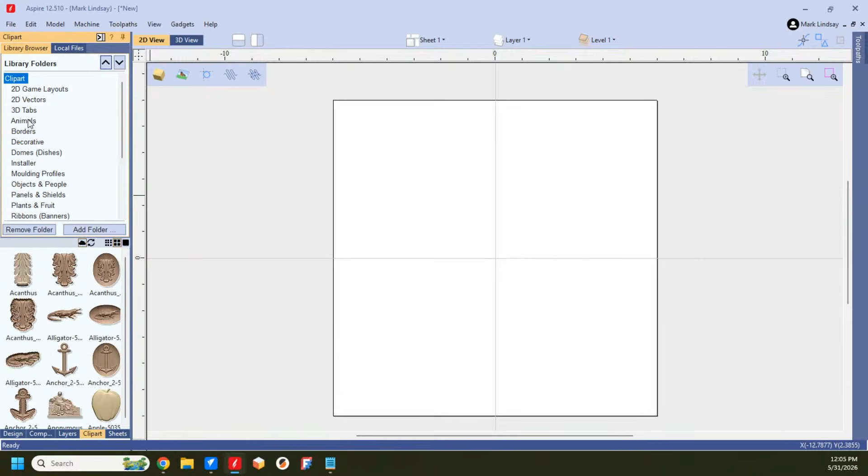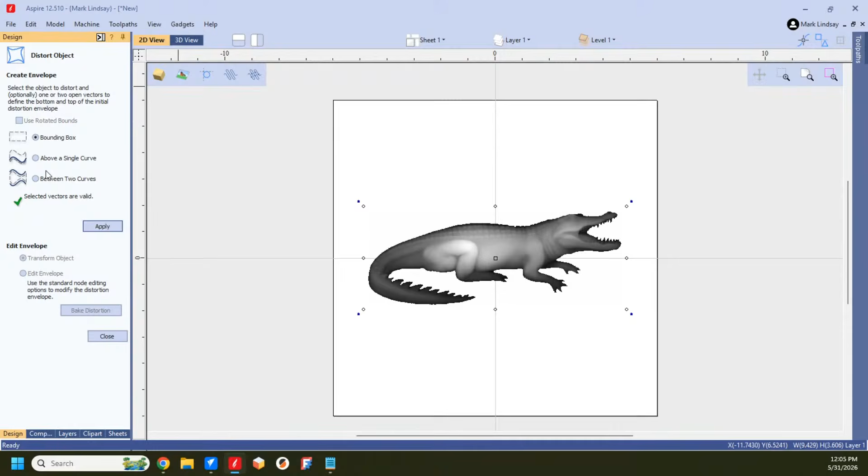Let me explain. I've got a session of Aspire open here, okay, and I'm going to go into the clip art, and we'll get our buddy Wally Gator. I'll double click him to put one in the center of my project, and hold down Shift and resize him about like so. We'll come back over to the design tab with Wally selected, and go into the distort tool. I'm going to use a bounding box - I don't have a curve drawn, I'll do one on a curve in just a minute. We'll click apply. Now we come down here to where I can edit the envelope, which is the bounding box, and I can bring this down, make him look taller and fatter, a little bit longer.

We'll bring this back here a little bit, make him a little bit longer, make him look a little bit more imposing. All of that is done by editing the envelope, using the standard node editing options to modify the distortion envelope.

Now what I can do is mirror horizontal, vertical, or exit node edit mode. I can insert a point, delete a point, smooth a point if I have one selected, but I don't have one selected. So we mirror horizontal—nothing happens.

Right click. I can change this to a Bezier, to an arc. I can insert a point. All right, so I've inserted a point. Now I can move that around a little bit. I guess I was right-clicking on the wrong thing.

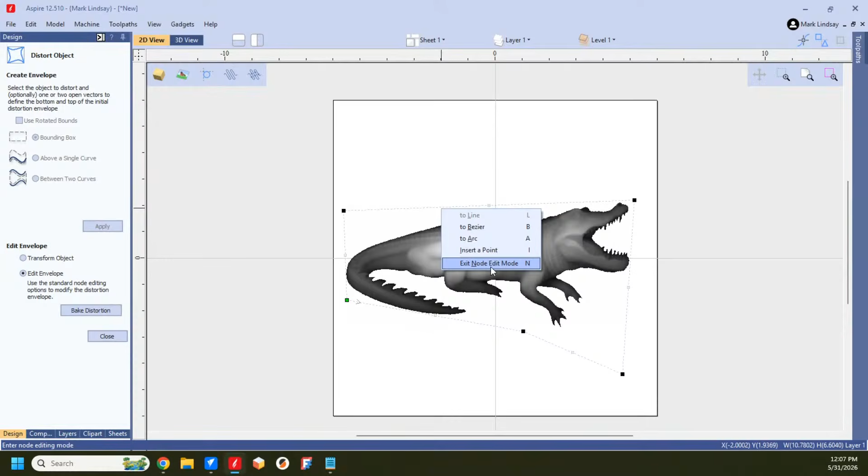Straighten out your spine, Wally. There you go. Now you don't look so fat—you just look like you have a bigger mouth.

The point is that you can distort 3D components. Now I have put him into an envelope and distorted the 3D model. I can close this, but it's not complete—I can't edit him now because he's still in the transitional mode.

With him still selected, I can go back into distort mode, distort tool. I have to bake the distortion to make this change permanent. So we'll go bake distortion. It says the component must be baked before editing. Okay, continue. Now Wally's been baked.

And I know how wrong that sounds, believe me. If I go over to my component tree, I see they've added the word 'baked' to the alligator title. So now I can come through and close this and do any editing that I want.

Or right click, component properties. Now I can adjust shape height, adjust a base height, fade, tilt—I can do all of that. I could not do that unless it was baked. It would not let me do that.

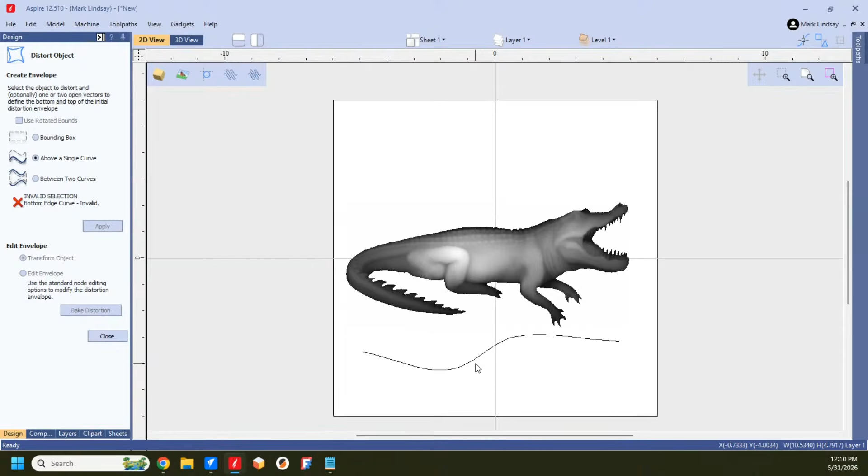Close it. With that curve selected, hold down Shift, select Wally, and come into the distort tool. I want to distort him above a single curve. I've got him selected. Now I need to select my bottom edge curve, which is this vector here. Hold down Shift, select bottom edge curve, OK, and apply. That's going to adjust Wally to match that contour, whether he wants to be or not.

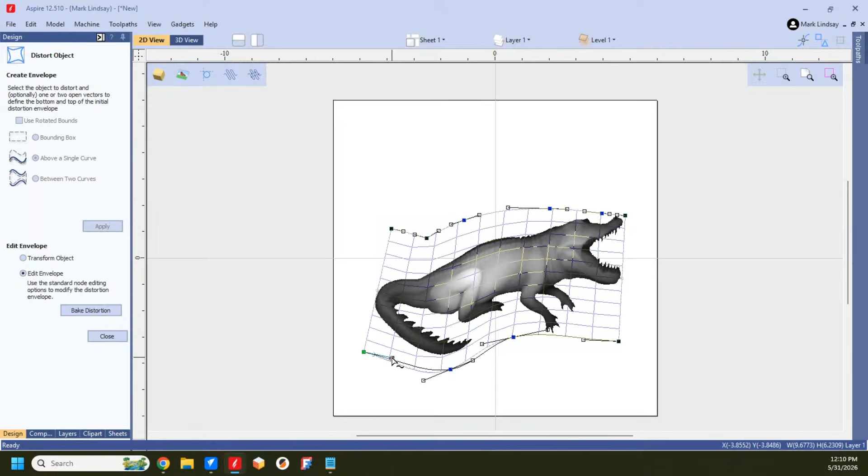But we go back into node edit mode because we're down here in edit envelope. We can adjust these slightly, make them a little longer, make this one a little bit shorter—just doing minor adjustments. Make that curve a little bit different, give him a kink in the tail, and drag that one out and up slightly. Yeah, he needs a chiropractor bad.

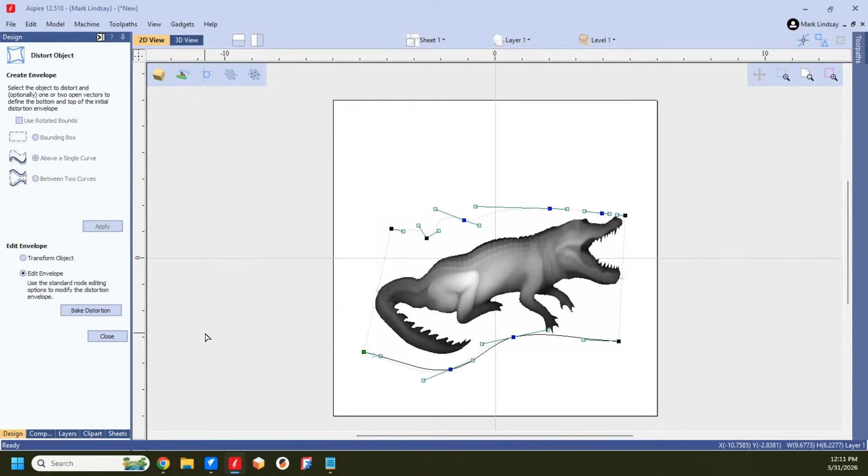My point is that you can adjust along a curve, then come in and make minor adjustments. Once again, we have to bake that distortion in order to use it.

Close that—if we're done, the vector is no longer needed. Come down into the component tree, and it is just simply updated Wally after our last modification. Go back to the design tab.

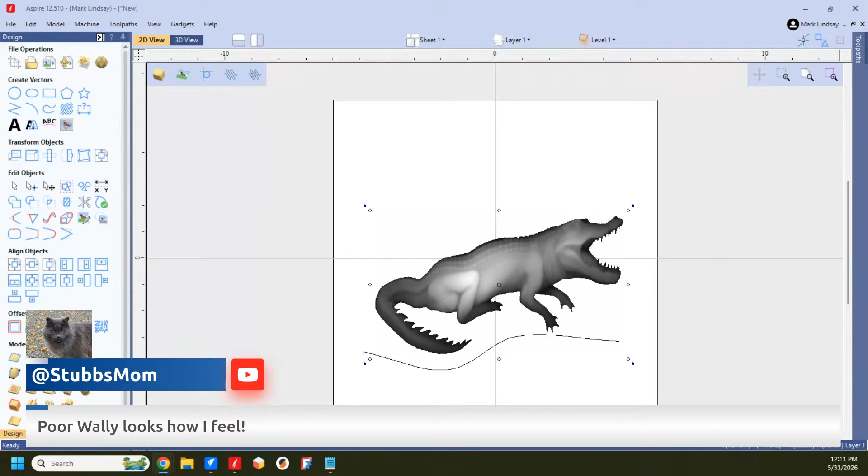Yeah, I hear you, I hear you. Wally's been through a lot.

Now, this is in Aspire. Let's go into a version of VCarve and let's check it out. So I'll go ahead and draw a line, a vector. Click, tap the letter S, so we're doing a curve. Do another curve, and we'll call that good.

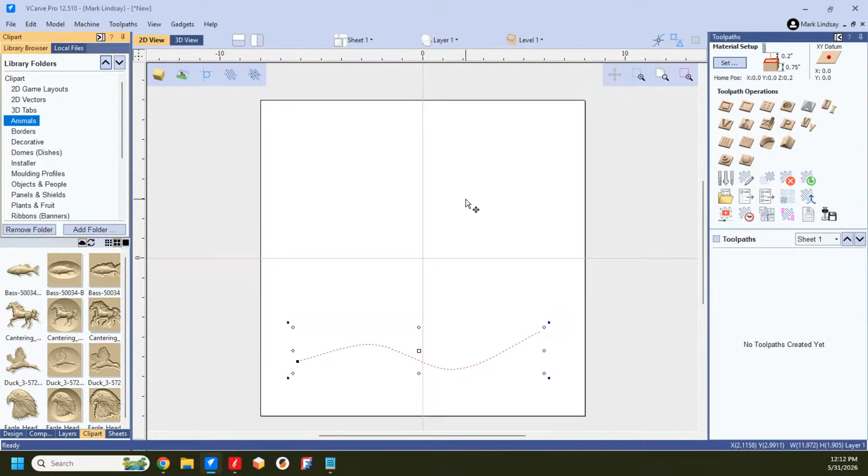All right, now clip art. Unfortunately, Wally Gator is in Aspire only. There is different clip art for Aspire than there is for VCarve. Everything you have in VCarve is in Aspire, but Aspire has more models. So instead of Wally Gator, we'll go for Billy Bass.

And we'll do the same thing—we're going to adjust Billy, and go from there. Back out to the Design tab, and I've got him selected. We'll do Bounding Box first, then we'll come up here to the Distort tool, and we see 'Invalid Selection'—distorting components is not supported.

Distorting 3D components is not available in VCarve Pro or desktop, because at the end of the day, it creates a new model, and VCarve will not create a new model. So even if you go above a single curve, click off, select the curve, select Billy Bass, distorting components is not available.

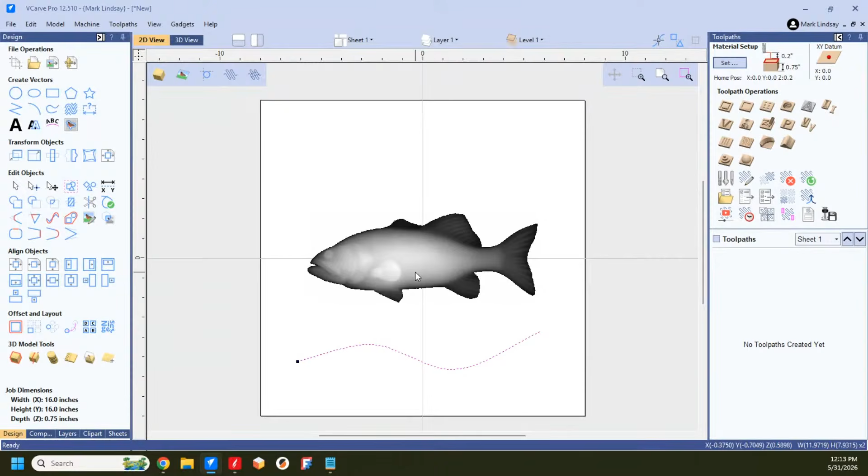So the answer is yes, you can distort 3D components in Aspire, but not in VCarve. We'll get out of that, delete, and draw another curve.

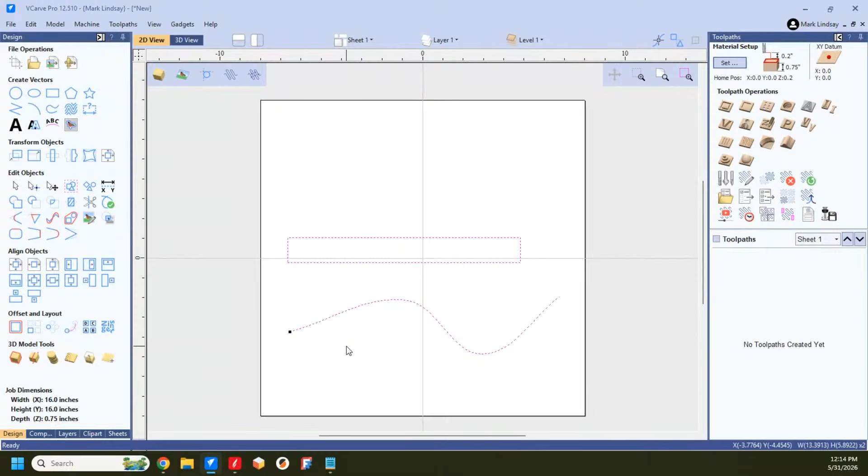Accept that vector. Now, can you distort objects on a curve? Again, I'm in VCarve Pro now, not in Aspire, and the answer to that is yes. You can take a closed vector, an object of whatever type, hold down Shift, go into distort mode. The vectors are valid. I can distort in the bounding box.

I can go above a single curve and we'll apply. And it distorted that rectangle along that curve. But again, I still have all my nodes here. I can edit and change things around should I want. I can move that around, bring that up, move that around. Any handle, I can change it.

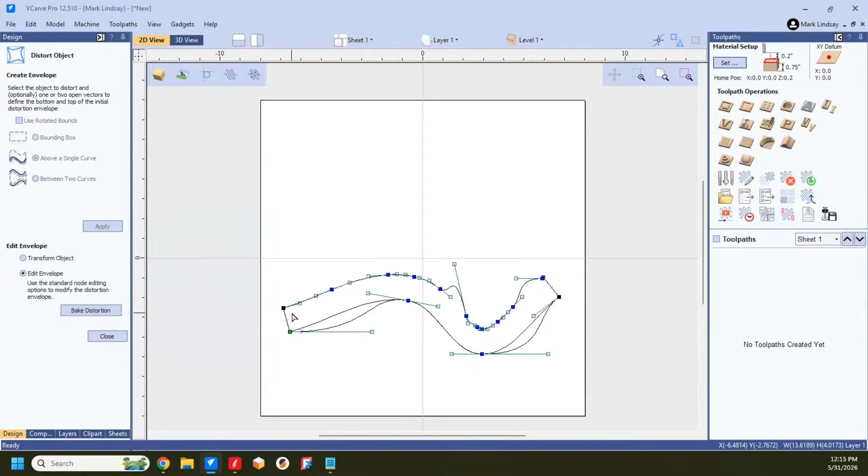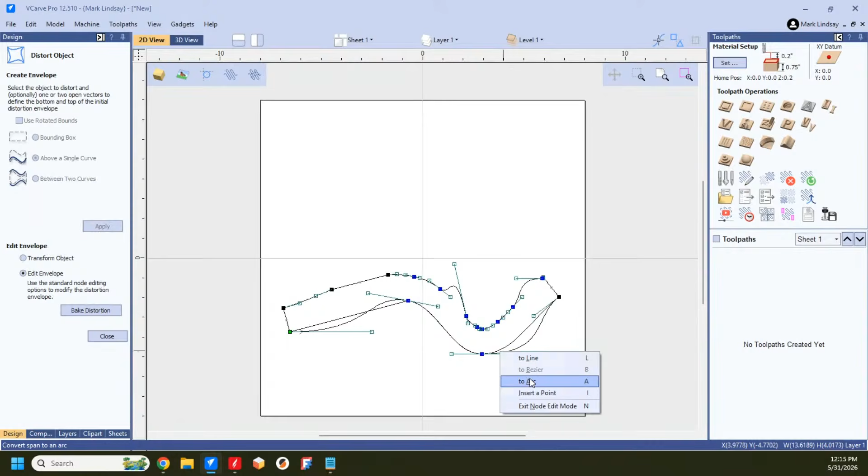I can right click and make that a straight line should I want to. I can select this and make this a straight line if I want to. I can right click and turn this into an arc. All of that.

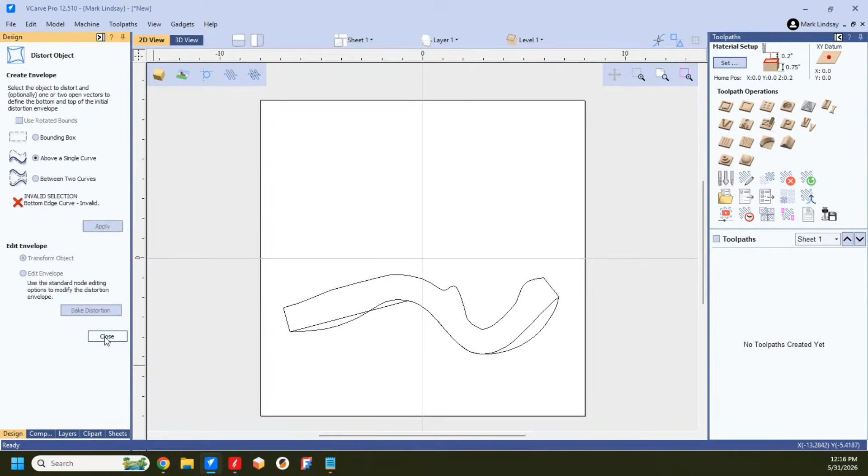So again, I have to bake this distortion once I'm finished. So we'll bake that, it's done. I can close it, come out of node editing, and get rid of that vector as it's no longer needed. Wrong vector - there we go. And my distortion is complete.

So yes, you can distort objects. More than just text, you can distort open or closed vectors in the software.

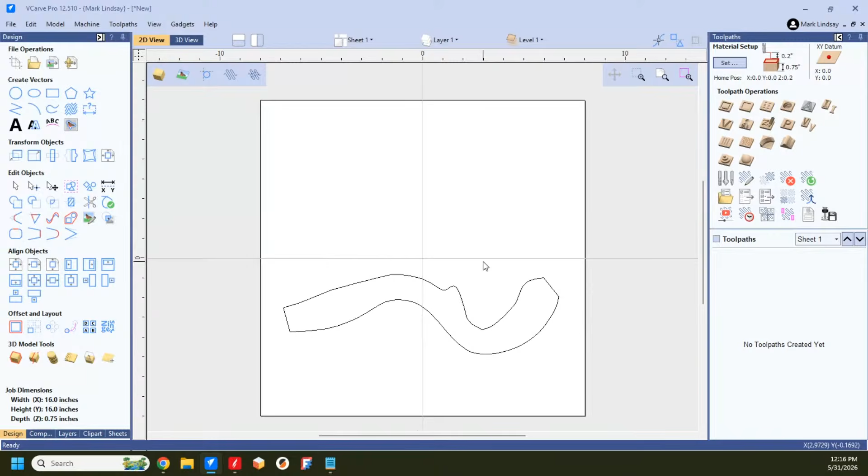You cannot in VCarve distort components because at the end of the day, you're creating a 3D model, and you can't create a 3D model in VCarve.

Butch, you've been eating the green crayons again, haven't you? I told you to stay out of them. They're not ripe - it appears they have psychotropic properties.

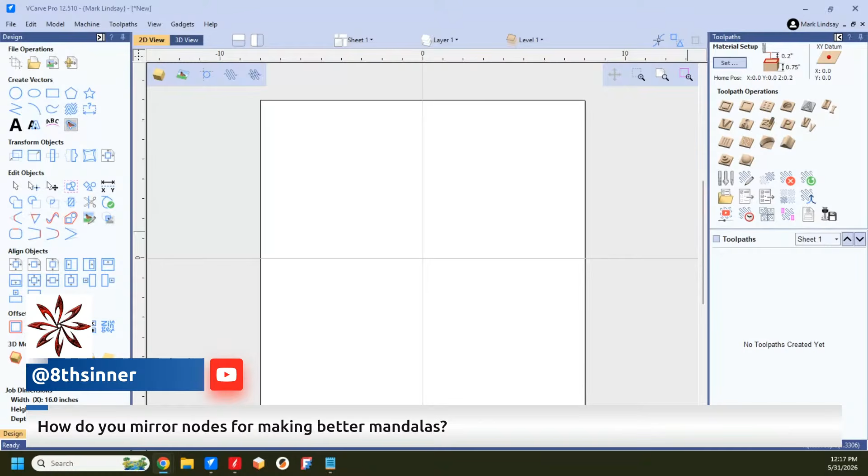Okay, let's see here, we have a couple of other questions. 8thsinner is wondering how do you mirror nodes for making better mandalas? I'm going to assume you're talking about mirroring a pattern.

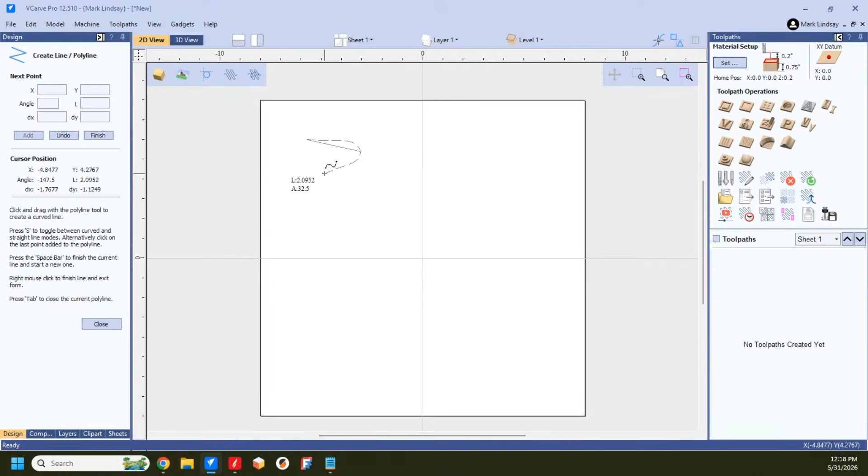When you get into a mandala, you've got a lot of repetitive features and elements. Let's play here just a second. I need something that's going to have a lot of points, so I'll make another curve here. This is nothing that I would want to play with - it's got a lot of points.

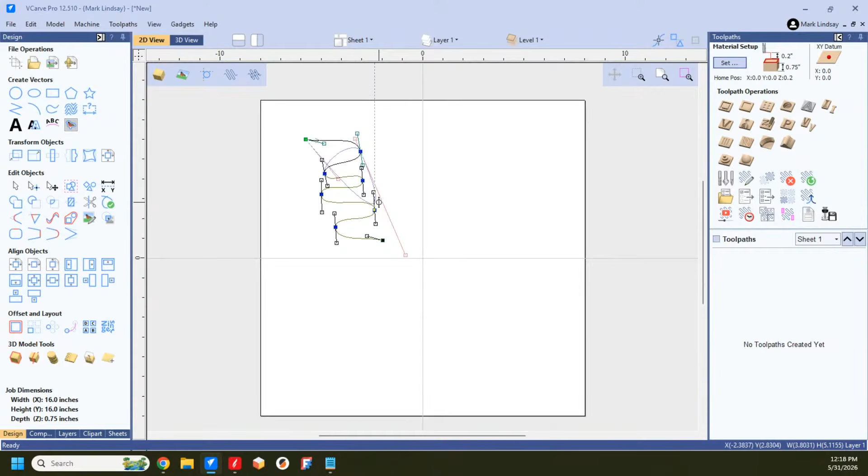Let's go into node editing by tapping the letter N on my keyboard, and we see how many points I have here. Now, if I want to mirror the nodes, let's say I want to mirror these 3 nodes, I can select them, box select, right click, and I can mirror horizontal or mirror vertical. Let's mirror them horizontal.

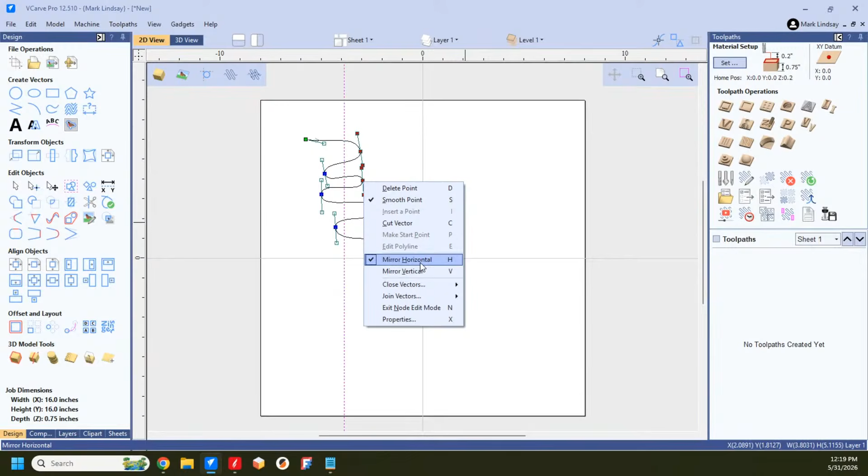Well, it won't let me do that because I don't have any kind of vectoring out here. Let's try it again - right click, hello, right click. Mirror horizontal is... I'm going to have to check into this, 8thsinner. I'm going to have to check into this. Maybe I don't understand how they work.

Click on that, hold down shift, click on that, hold down shift, click on that, right click, mirror horizontal. Nope. Okay, let me work on that for you. That is something that would be intriguing to a lot of people - that's a good topic to get into.

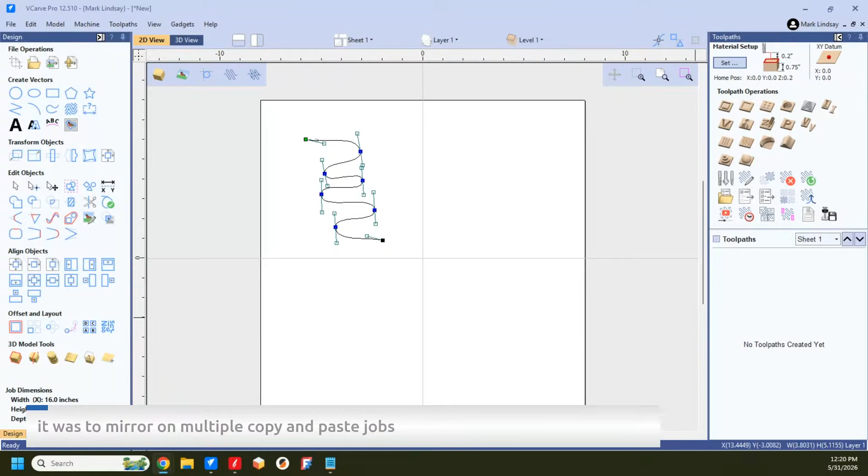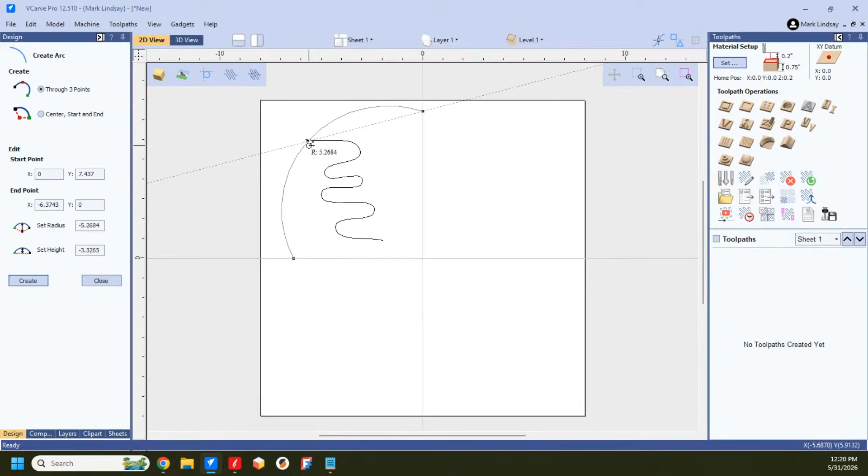Okay. It was to mirror on multiple copy and paste jobs. Now, what you can do - let me change this around just a little bit. Come out of node editing mode, and I'm going to create an arc from here to here. I'm going to come out. There, all right.

Now if I select this, I've got this quadrant done of my quote-unquote mandala. I can come up and mirror the entire thing, clicking on that - I want to flip about the job center, which is my X0.

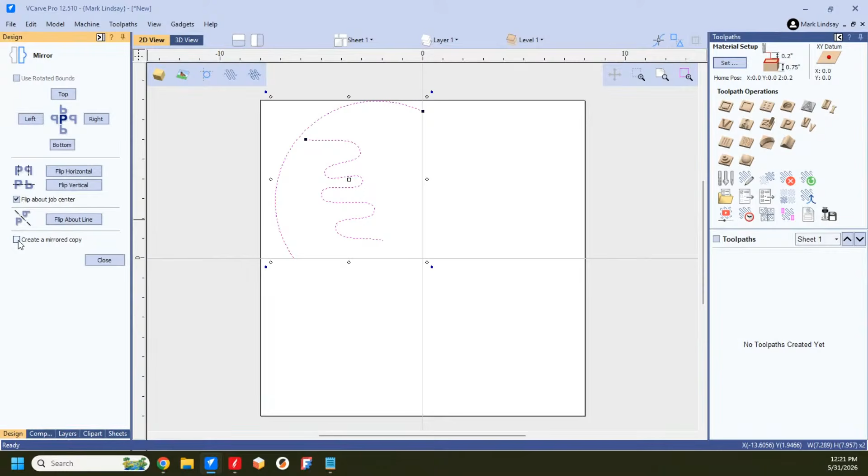And I want to flip it horizontal. I want to create a mirrored copy. Now I'll flip that horizontal. Now I can select all of this. And with both of these check marks, I can flip vertical. And now I have my completed quote-unquote mandala.

This arc does not make a perfect circle. No, it doesn't. But you get my point.

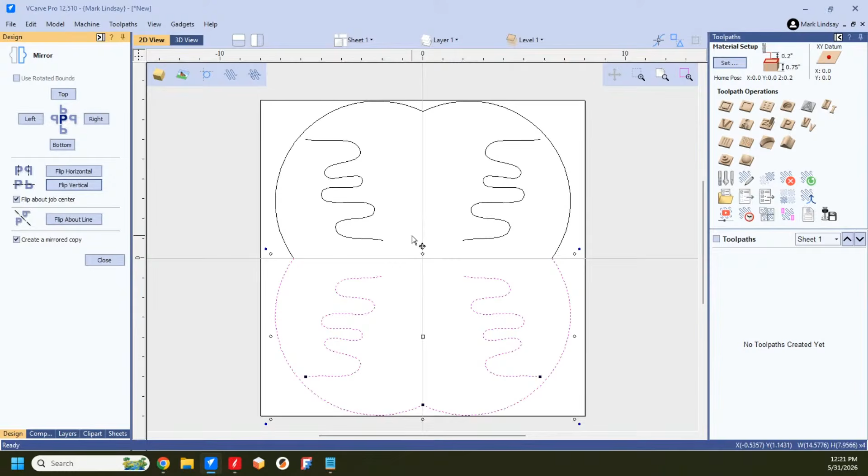If you get 1/4 of your mandala completed, you can then simply mirror everything. However, what you need to remember is these are all still separate vectors. They are not joined, so you'll have to come along and select them all, close and join them, so we get one closed vector after joining.

Now we've got that taken care of. The same would be true if you had half of a design here along your Y0 line. Say you've got half of a star here and some circles that are increasing in size. You would have to select those when you mirror everything, then come back, select all of these above and below your Y0 line, and then join them as well. So that would work out really well for your

situation where you're trying to make a mandala.

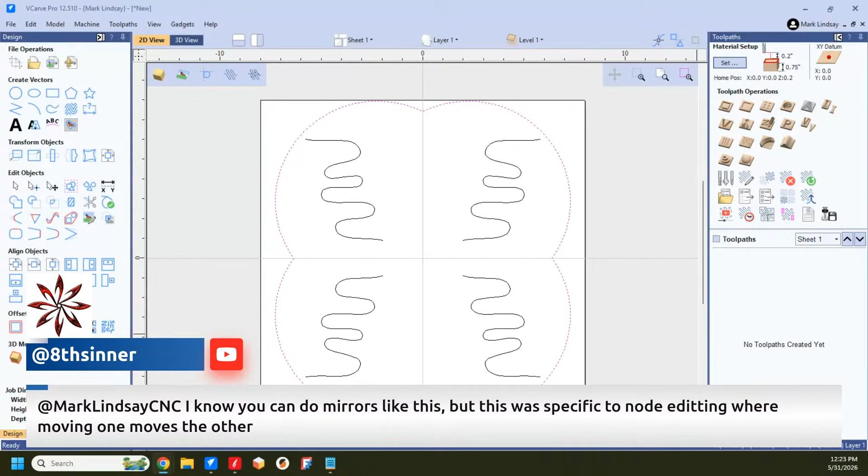I know you can do mirrors like this, but this was specific to node editing, where moving one moves the other. Let me work on that, okay? Now, as far as moving multiple nodes, yes, you can.

Let's go with this one for the sake of argument. Got it selected, and I'll tap the letter N to go into node editing. And we'll select these nodes here, and click. And I can just grab one and drag, and all three of those nodes move.

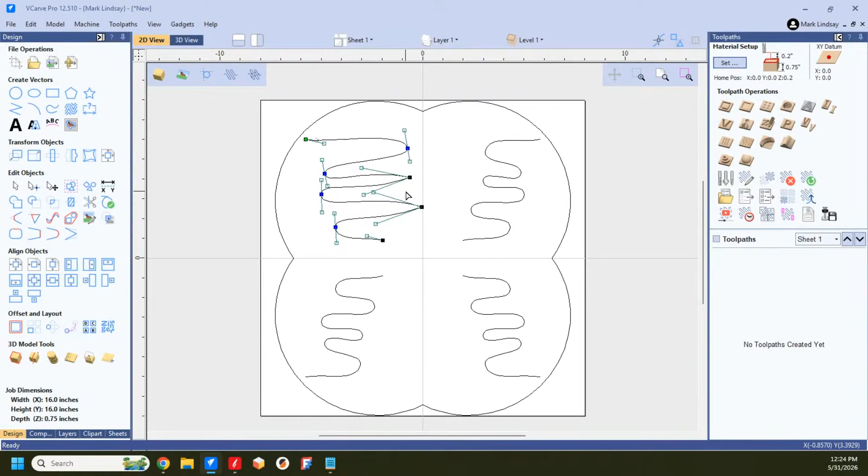Now they also change their radius because they were moved. You see, these are no longer nicely rounded like they were. Control Z - they're nicely rounded like they were. Control Y to redo it. And we've got more of a point situation going on here, and that's simply because of how tight the radius is. This radius was a lot larger than these two.

So yes, you can move. You can move, but I won't say you can mirror nodes. Let me work on that.

So let me go back to Barry's email here. He says, I use VCarve Pro. Okay, so that means you cannot distort 3D components. Sorry, but you can do 2D objects.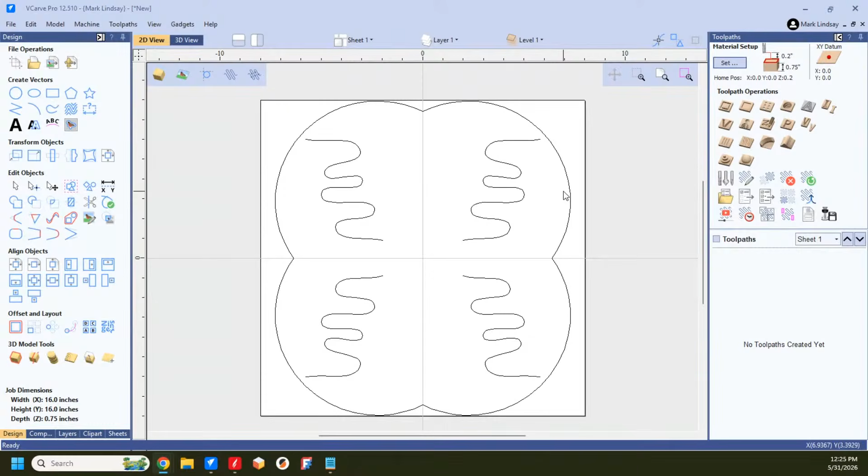I use VCarve Pro, clip art, 2D games layouts, cribbage board, oval, 12 by 12. Okay, let me select all of this, and we'll get rid of it. And I'll go into clip art, 2D game layouts, cribbage board oval, 12 by 12. There we go, all right. So I have that, I'm all set.

Let's see, I was thinking that if one ever needed to scale the size, then you run into the issue that the peg holes would also change sizes. Would the answer be to create your own array of holes, then work with them to arrange them along your circle, square, oval, after you've created the size you want? All right.

When we get into scaling, let me check something here. Oh, thank you - all of the holes are grouped. That is a major pain if they are not grouped. If you ever go to make a cribbage board, group the holes. Otherwise, you're going to be selecting over and over and over again.

All right, so let's select all. We've got all of our vectors selected, and we're going to scale it up. My material size is 16 by 16, so what I want to do is go link XY, keep that selected, and I want to go to 15.5. And I'm going to apply, and I've increased the size. Now all of these holes, as you pointed out Barry, they've increased in size as well.

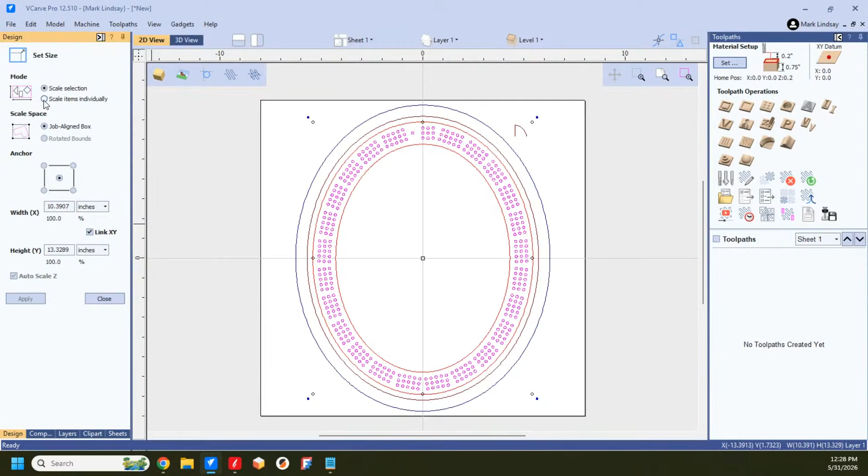So once you have scaled up your cribbage board to whatever you want, select them, ungroup them, rescale them back down to the size you want. So scaling the items individually, but again, they have to be ungrouped to do that. Then once you have rescaled those holes, hit G on your keyboard, and that will group them again.

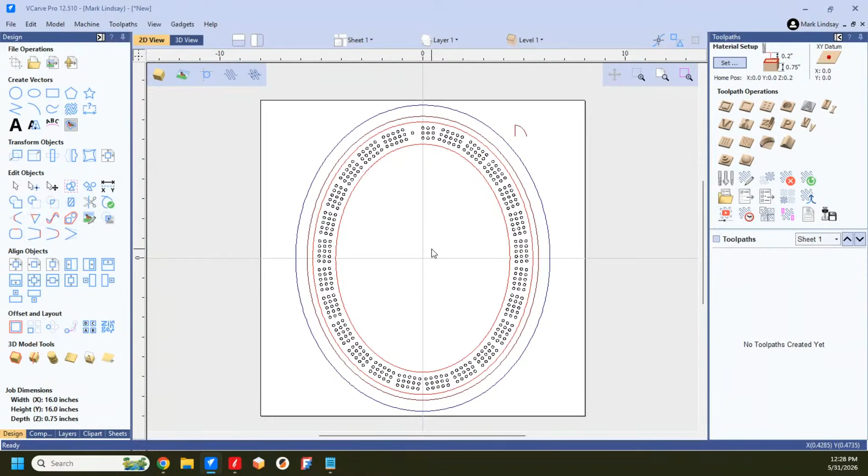Kurt Crafty Jan says, Butch, I always put peg holes on their own layer. So do I. Then I can duplicate the layer, lock it, and hide it. Yep, same here. That way, if I ever goof up and delete a bunch or mess them up somehow, I have them.

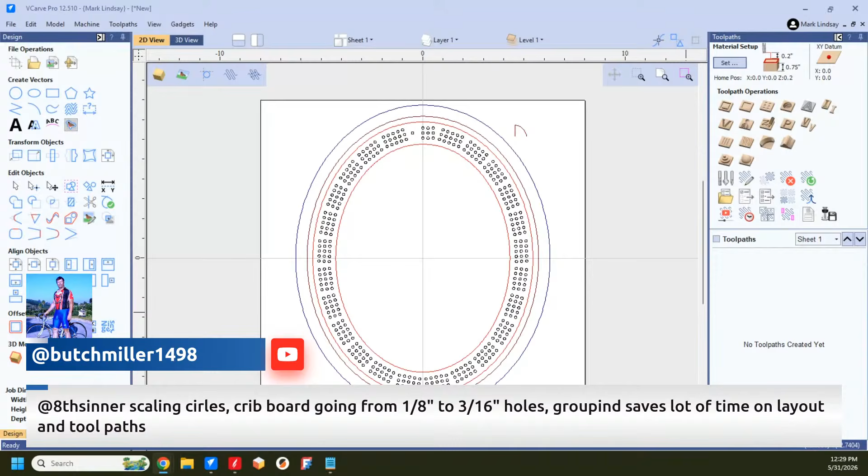Butch says, scaling circles, crib boards, going from 1/8 inch to 3/16 holes, grouping saves a lot of time on layout and toolpaths. Yes, it does. Saves a lot of time and a lot of frustration because, again, then you've got to go in and start selecting all these son of a guns.

But there's another cheat to that. You just hold down the control key, tap the letter A, and that selects all the vectors. Now, hold down shift and deselect the vectors that you don't want to select. Now you can group all these.

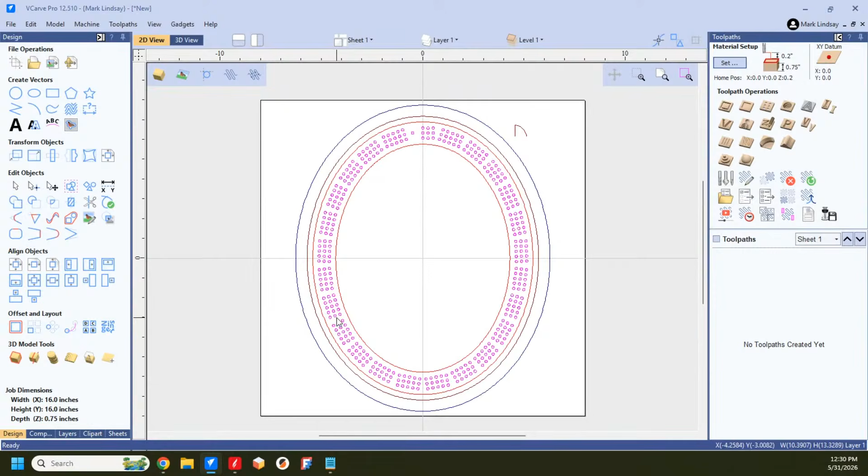And then, again, put them on their own layer. Right click, move to, layer. Oh, they're already on another layer. Great, Vectric has taken care of that for us. So I can come up here and look, and there they are: peg holes, V-grooves, molding vectors, and the profile cut. They've already done it. All we have to do is get in and play with them. So the peg holes are on their own layer already. That's a major time saver as well. And we have room to put a 3D component out here.

So back to your email, Barry, and this will be the last one here. Another thought I had: if you created a line of holes in a pattern and then wanted to bend them along a wavy line, what is the solution on this project?

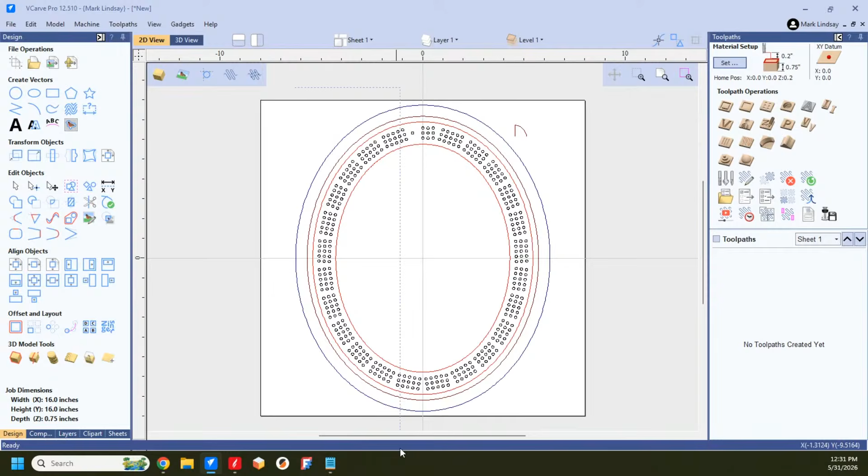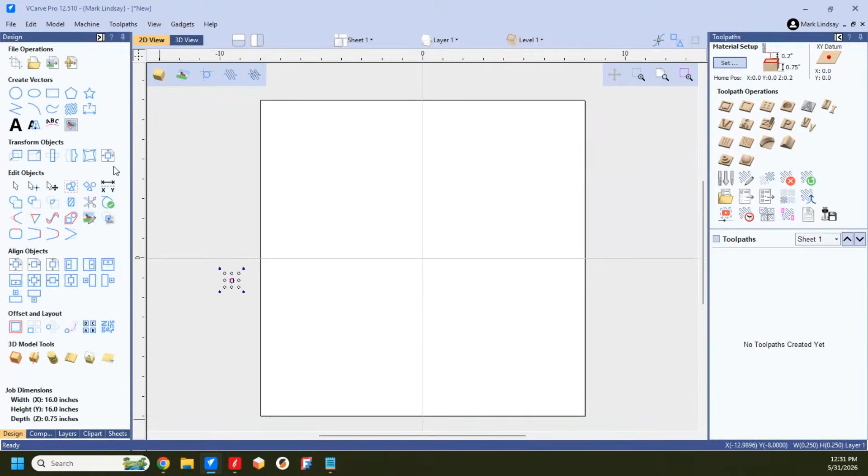Let's come back over here. We're going to get rid of the cribbage board and delete it. We've created a bunch of holes in a pattern. We're going to go with some 0.25 inch holes. I don't know what kind of pattern you're thinking about, Barry, but let me back off of this for just a second. No, I will. I've got to create one hole. So we're going to go with the 1/4 inch diameter, 0.25, and we're going to put it right here off the material. Close. And now we'll make our wavy line.

Boom, boom, boom, boom, boom. And accept that. Close. Now, what I can do is I can create an array of these circles along this line. If I know the distance between the circles I want, then I can do that. If I know how many circles I want, I can do that. If I know how many circles I want and the spacing between them, we're going to see if we can do that. So I've got my vector selected, I've got my circle selected.

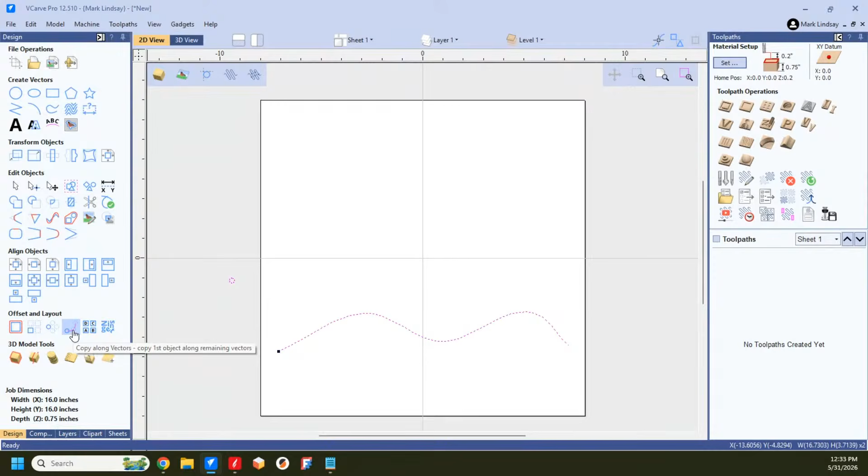I'm going to come down here to copy along vectors. Copy the first object — that would be my first object. I selected them backwards. Copy the first object along remaining vectors, plural. So we'll go into here. Select object to copy, followed by one or more vectors to create copies along. I did. I selected my object first, and there's my vector.

Now, do I want the distance between copies, or do I want the number of copies? So if I know I want a distance of a 1/2 inch, it's going to take that circle and figure out how many it can put along this vector 1/2 inch apart. So let's select that. I've got them both selected. Align the objects to the curve — that means more if it's any shape other than a circle. Create copies on a new layer — I'm going to turn that off just to make it easier. Reverse direction, I don't need to worry about that. And I click copy. And that put as many holes as possible along that vector, maintaining that 1/2 inch distance.

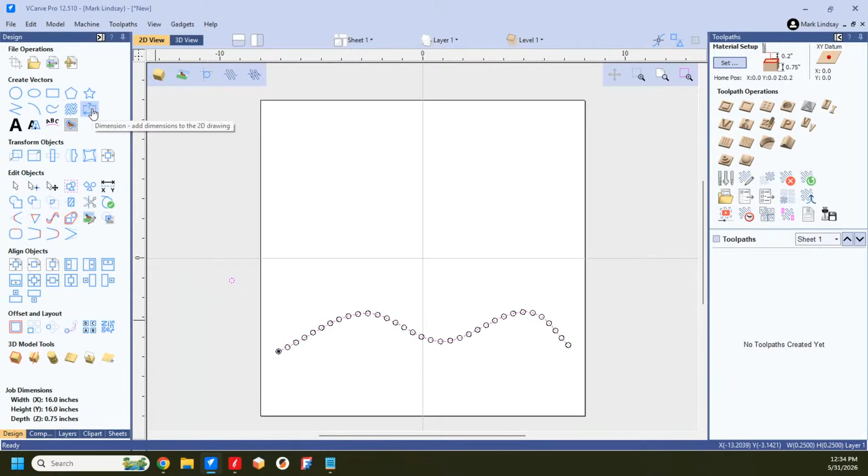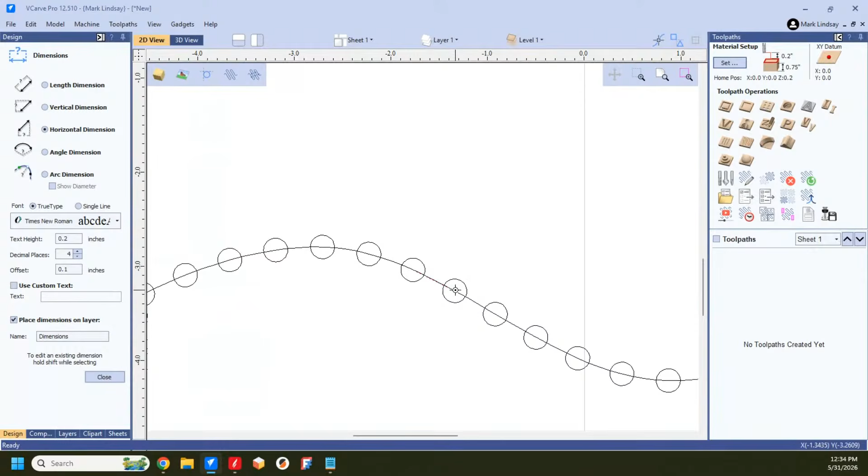Now, let's look, let's see something. Let's close this. Let me get out my dimension tool. And let's see, is that a 1/2 inch on circle, or on center, rather. That is close to — let's Control Z. Let's go with horizontal dimension. I want here, and I want here. And not quite 1/2 inch. But we also now know it definitely wasn't from edge to edge.

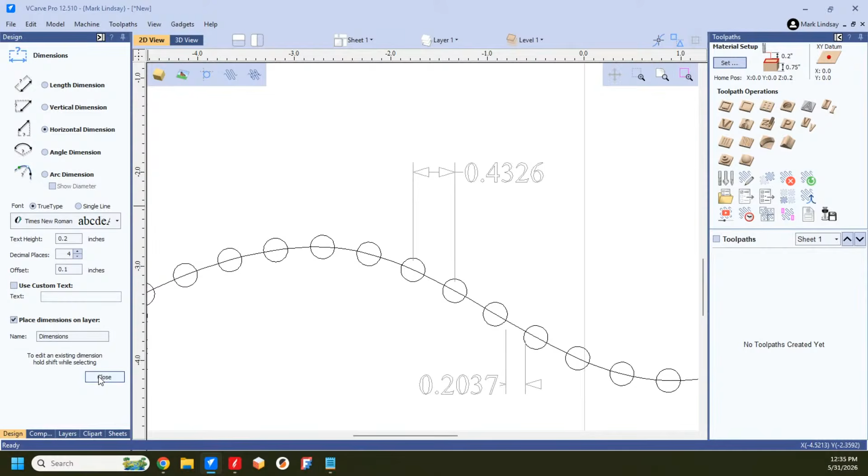That's not nice. Let's Control Z to get rid of all those circles, and let me take a look at why it did that. No, there's no tolerance. Wonder why it didn't force a half inch. Because...

Oh, because I forced even spacing. That's why. Okay, so I shut off force even spacing.

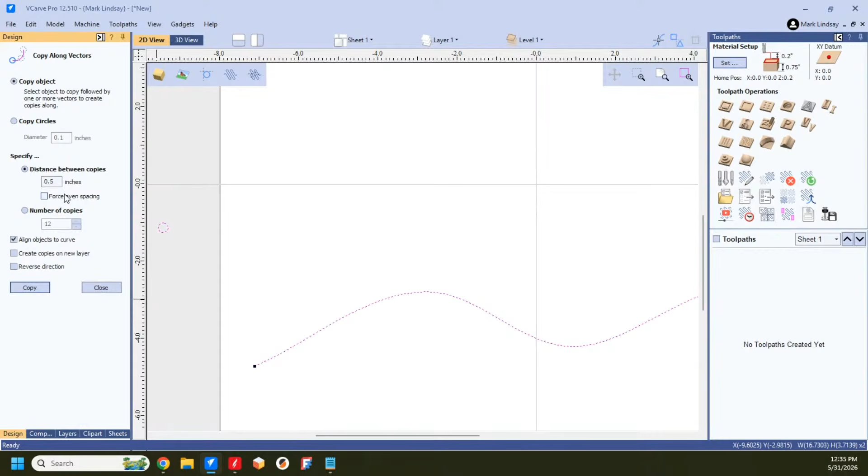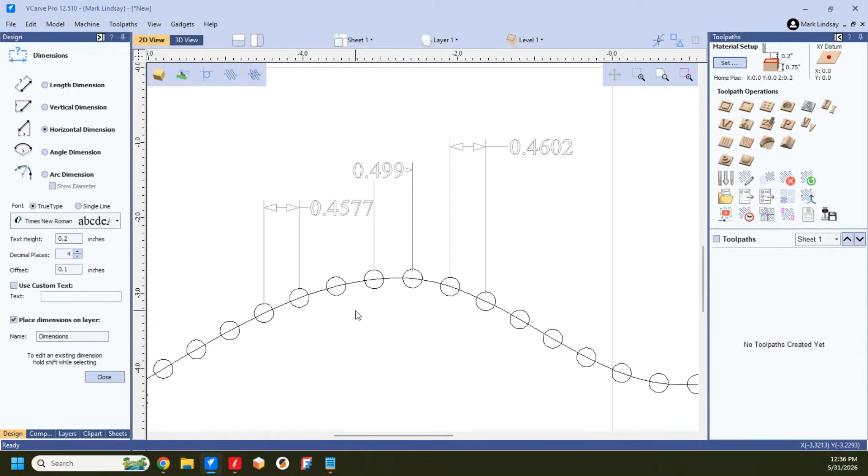Now let's copy, close, grab my dimension tool, and let's see now. I want horizontal dimension. Still not 0.4602, still not a half inch. Now we're closer, but still not a half inch.

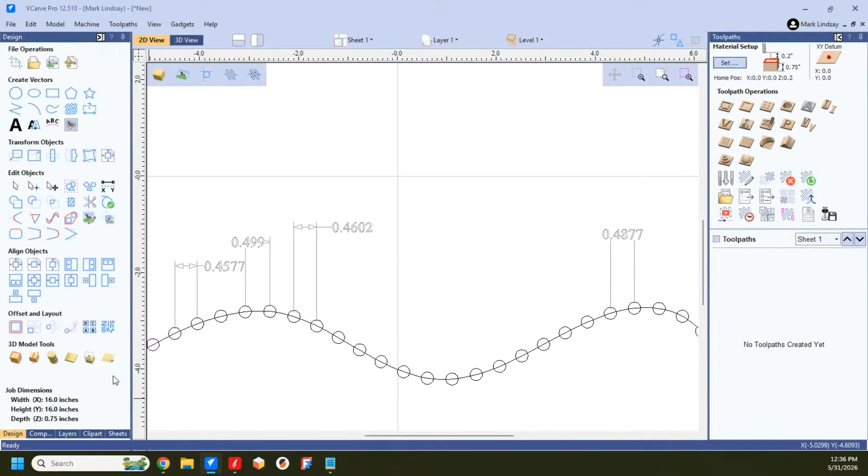Close but no banana. Intriguing, I'm gonna have to check that out. Let's get rid of those. Control Z, Z, Z, Z, Z. Select my circles, select my vector. I'm going to have to check that out. There's a tolerance in there somewhere that I'm going to have to find and see where we can adjust it.

Instead of forcing a distance of a half inch, let's go with the number of copies. Say I want 12 instances. Okay, 12 copies—it's going to put 12 copies along this curve and let the distance between them be what they are. We'll copy, and there we go. We've got 12 circles along that curve.

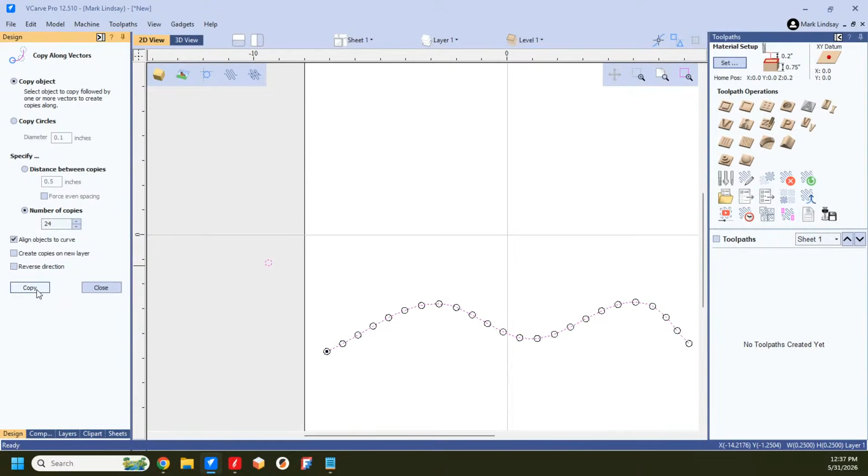Control Z, let's make it 24, and copy. You can keep going right along. Control Z, 48, copy, and 96. They will even overlap circles, and this can create some pretty cool effects. This can make some real cool effects.

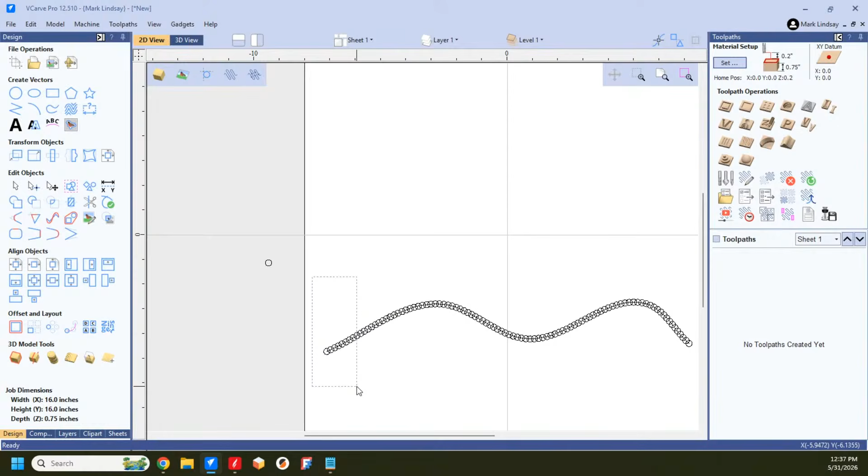Close this and I'll show you what I'm talking about. We can go swing here, do a V-carve toolpath. I'm going to leave everything alone here and calculate. I know I've got overlaps, I don't care about that, that's part of the design. Continue anyway, ignoring one unsuitable vector, which is the straight open vector. Okay, now what we'll do is preview it.

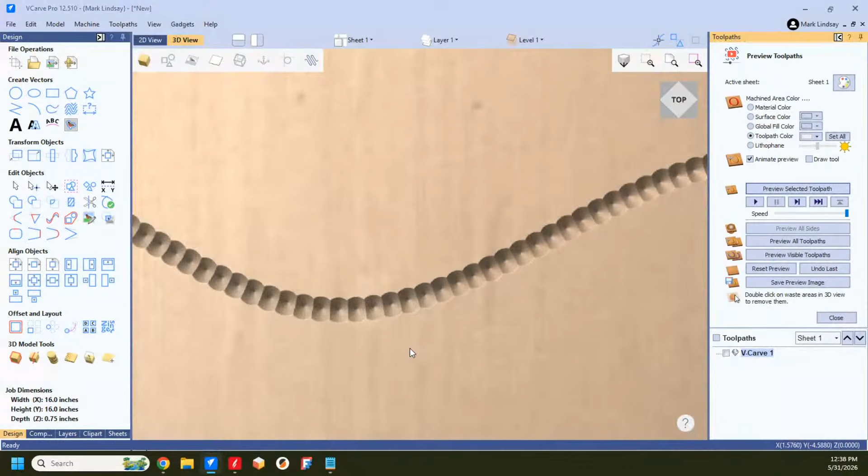And that's the effect we get. It's actually pretty cool. Let me reset the preview.

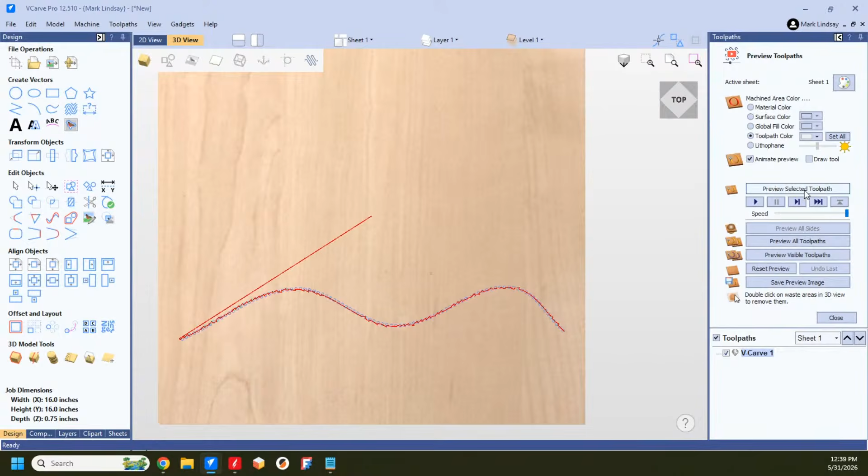Go back into that toolpath and let's change over to, let's go with a 60-degree V-bit. There we go, select that, and we're going to calculate. Continue anyway, I know you're ignoring the open vector. Now we'll preview that, and we've got a much deeper carve.

It's going 0.2165 max depth, which looks pretty cool. Jim Brown says now use it as a texture.

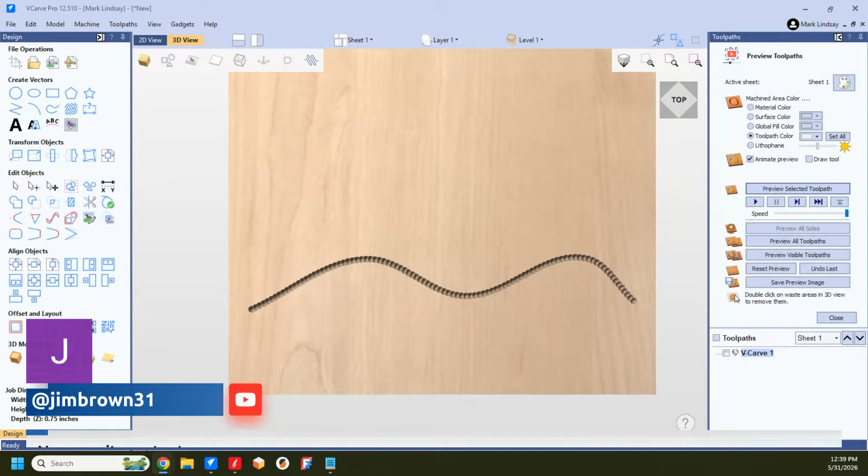That would be cool, that would be cool. You know, Jim, you could use that as a texture. If you did that in a straight line and then made a texture out of that, that would look real cool. Man, so you guys come up with some great ideas.

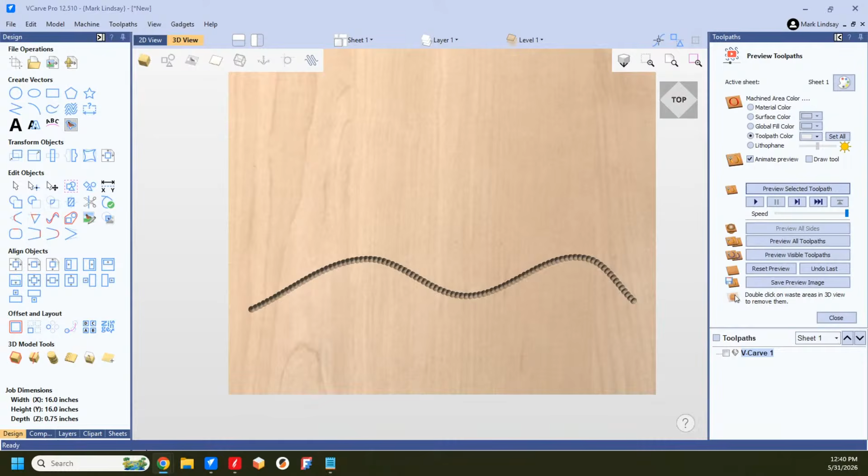Let's get back over here. I had a question from Bruce Malmstrom about tools that can be made for the CNC or made with the CNC. And as I mentioned to him, that list is mighty long.

Now, the first thing I would say is you need to identify what kind of tool you're talking about. Are you talking about a jig or fixture for a specific tool? There are all kinds of fixtures I can think of that you could use on a table saw with your table saw fence. A tenoning jig that'll hold a piece vertically and allow you to cut a tenon on your table saw—that could be made with the CNC.

Something as simple and stupid as sacrificial push sticks—you can see this one's been through a lot—they can be made on the CNC. Auxiliary tables, straight edging jigs. I have a small straight edging jig that's currently under the CNC now. Basically it's got two vertical hold-down clamps that I got at Harbor Freight for, I want to say, $3 a piece when I bought them. It's been a few years, so knowing Harbor Freight, they're $8.99 now.

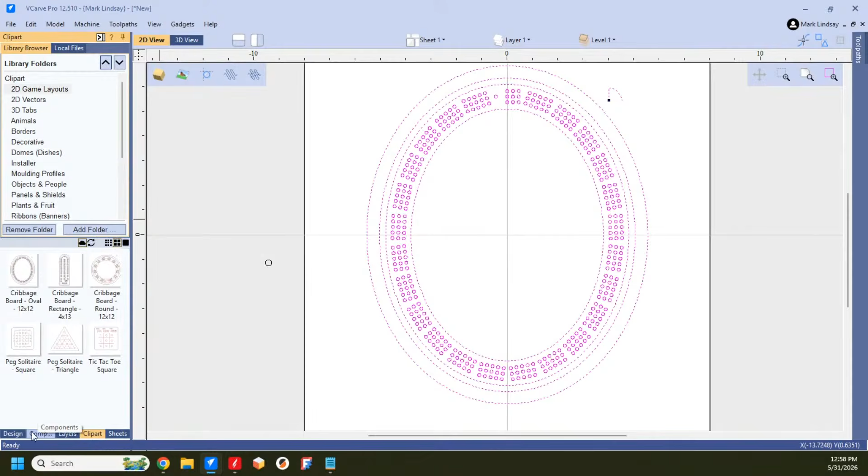Let's look at this. Let's go back into the software. We'll reset the preview, get rid of that, delete this, close out of preview, come back to 2D view, select all, and delete all that. Let's go back to clip art and get that oval cribbage board. Go back to design tab. Now let me get into my layers. Layer 1 is the active layer. We turn off the peg holes, the V grooves, the molding vectors, and the profile cut.

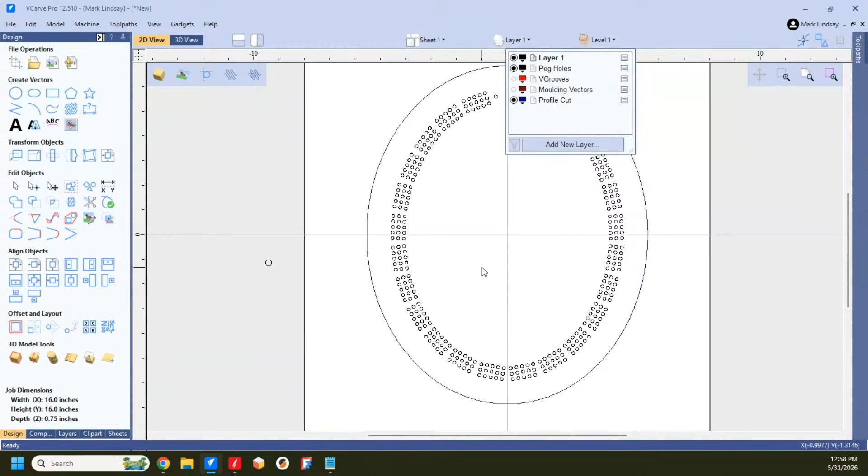What I'm going to do is turn on the peg holes and the profile cut. Let's see how this works there, Wade. We'll select those two and tap the letter G to group them.

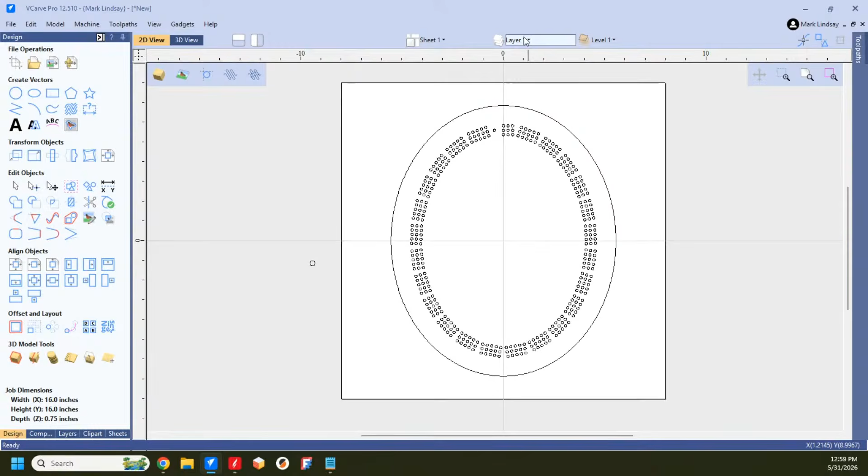Now we'll go to layer. We'll turn off peg holes. I still see them. We'll turn off profile cut, and I still see them. I'm working on layer 1 - it has grouped them there. Let's turn on peg holes, make that active, turn off layer 1, and we see they're gone. They did do that.

Wade says, I'd like for it not to do that. What it's going to do, if you group 2 items on separate layers, it's going to do that, and you are choiceless. That's what it's going to do. The reason is it's going to put it on the layer you have active. The only way you can get it to not do that is basically put all those vectors on the same layer, if you're grouping them for a reason.

So, let me ask you this. Why are you grouping them, Wade? Why are you grouping objects on two different layers? That doesn't make sense to me. Is it because you want them to run during the same tool path? Because you can do that in the tool path thing - you can group the tool paths. Or is it some other reason you want to use? I don't know.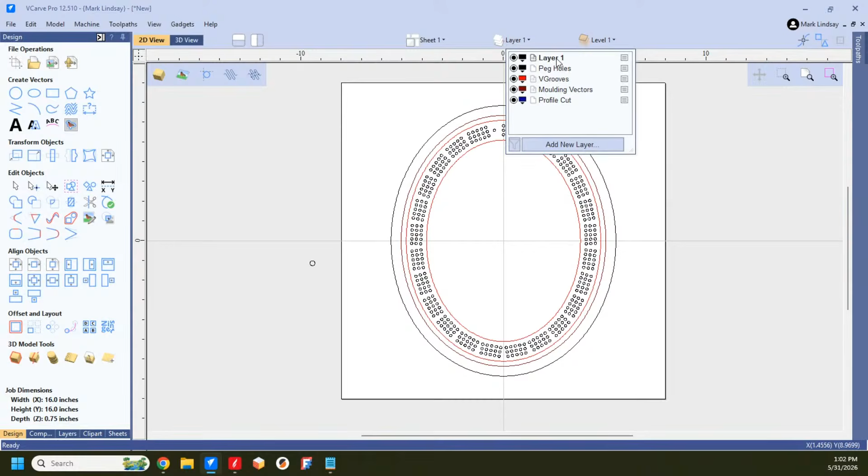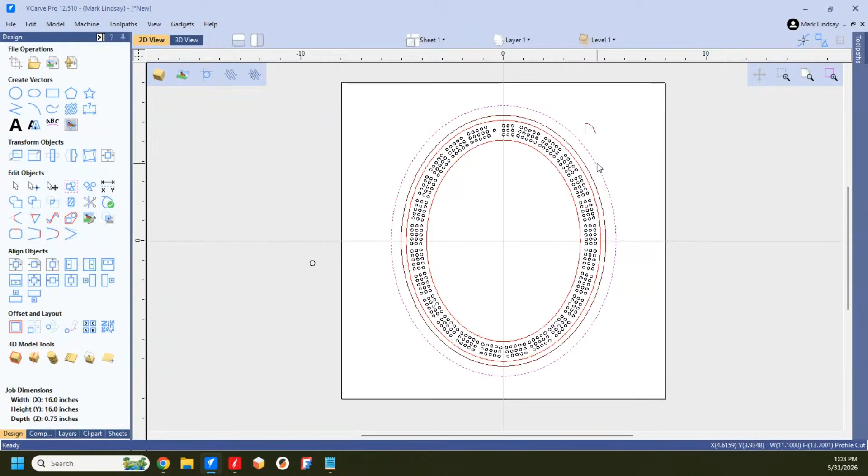Now, after they're grouped, let's see here - I got them all selected. Ungroup. I can take these and move to layer peg holes. Okay, now I can take that and move to layer profile cut. And now, when I turn off peg holes and profile cut, they go away.

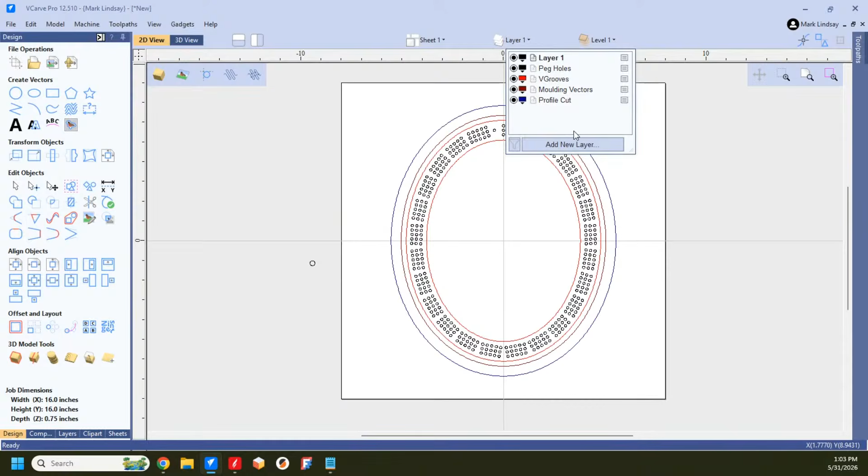Yes, if you group things from different layers, they will get put on the active layer. That's why it's really important to pay attention up here, that you're working in the right sheet, the right layer, and the right level when it comes to 3D components.

The right level being, come down here to the component tree, we have level 1. You can add more levels. You need to make sure that you're working in the correct level when you do things.